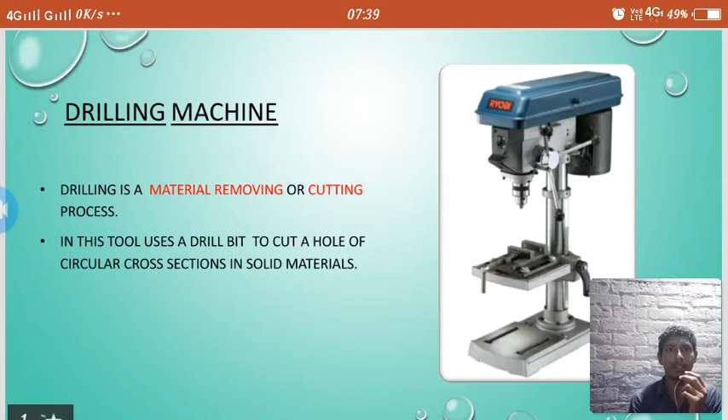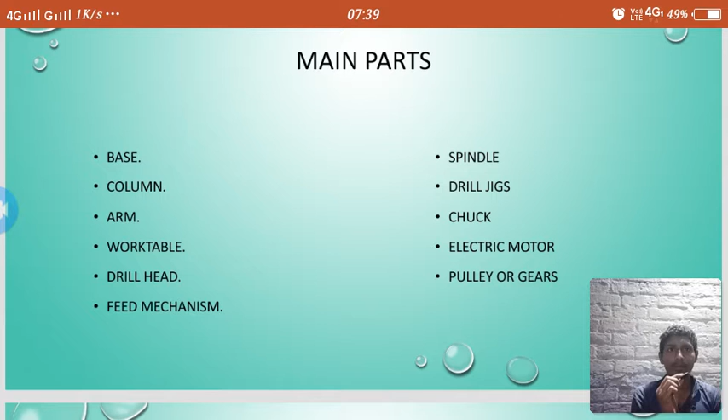Next, we see about main parts involved in the drilling machine. Some of the parts are base, column, arm, work table, drill head, feed mechanism, spindle, drill jigs, chuck, electric motor, pulley or gears.

First, we see about base. It carries the entire weight of the machine and it transfers the weight to the ground. The base of the drilling machine is generally made up of cast iron as it is rigid.

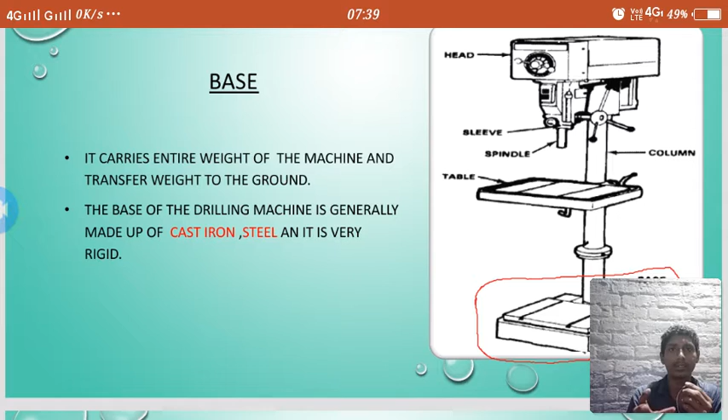Next, we see about column. Column is situated on one side of the base. In general, radial column is used for moving arm both in clockwise and anti-clockwise direction. Sliding table is mounted on the column for up and down motion. The column is made up of cast iron or steel as it is rigid to carry the load of the arm and drill head.

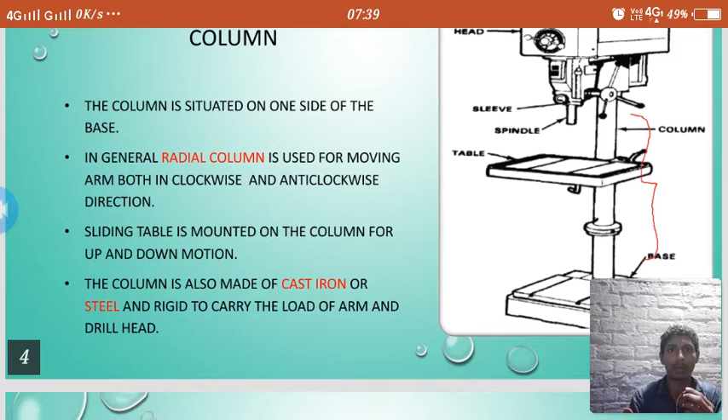Next we see about work table. Work table is generally made up of cast iron and it is mounted on the column. T-slots are provided at the top surface for holding the workpiece. Nowadays, in some machines, the bench vise is also used. Vertical movement of the table is given by rack and pinion mechanism. Shape of the table can be rectangular or circular.

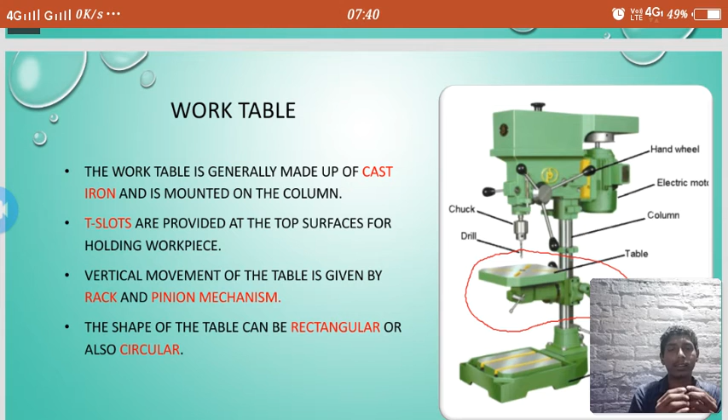Next we see about drill head. A drill head at one side of the arm consists of various feed and driving mechanisms. Different types of speed can be generated by the cone pulley mechanism and the gear train mechanism. It is present on the one side of the arm.

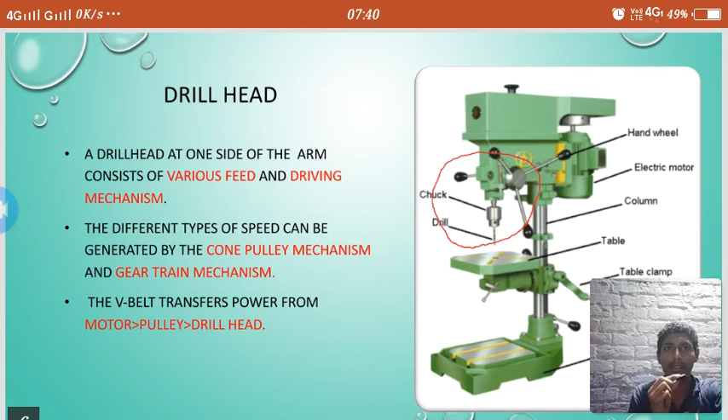Spindle. It is a circular taper shaft which helps to hold a drill chuck. It is made up of high carbon chromium steel or stainless steel or steel alloys. It transfers the rotary motion from the drill head to the drill chuck. The keyhole is provided in the spindle to change the drill chuck.

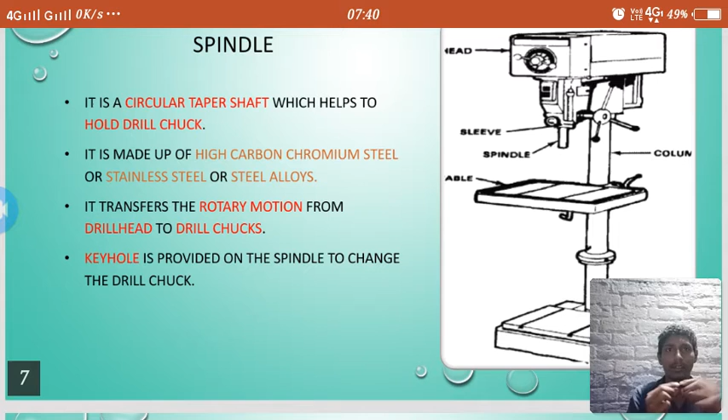Next we see about drill chuck. A chuck is mounted on the lower end of the spindle. It holds the drill. Keyhole is provided to change the drill chuck. Drill chucks are generally self-centering. Drill machines usually use 3-jaw chuck and it is made up of special alloy steel.

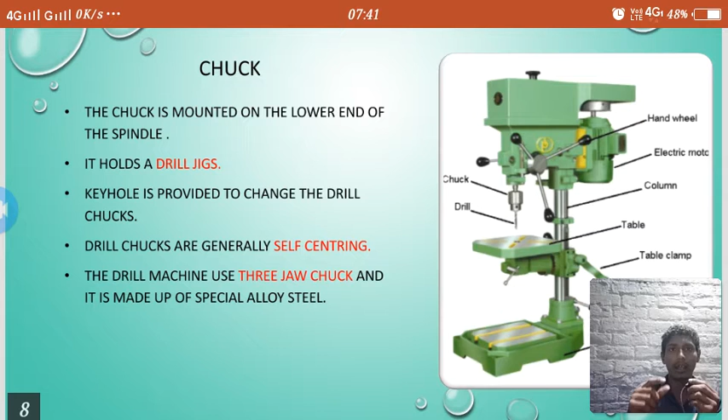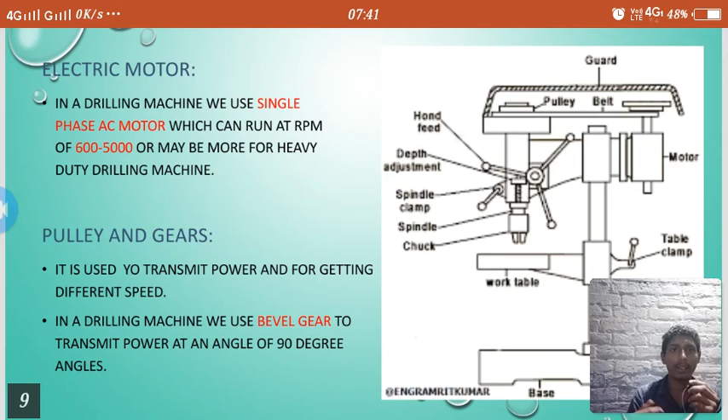Next we see about the principle of working. The power is supplied from the motor. The process of power transmission takes place by the V belt and the pair of stacks which are located opposite to each other. This power is transmitted from the motor to the pulley and to the drill head by various mechanisms such as rack and pinion mechanism, gear train mechanism, cone pulley mechanism.

The speed of the spindle is fixed or controlled with the help of these pulley stacks. The rotating edge of the drill exerts a large force on the workpiece and the hole is generated. The removal of the metal in drilling is by shearing and extrusion.